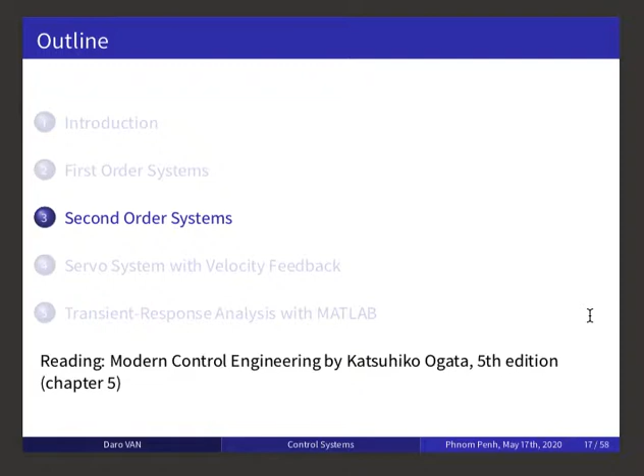In this section, we'll discuss second order systems. We shall obtain the response of a typical second order system to a step function, unit step input, ramp input, and impulse input.

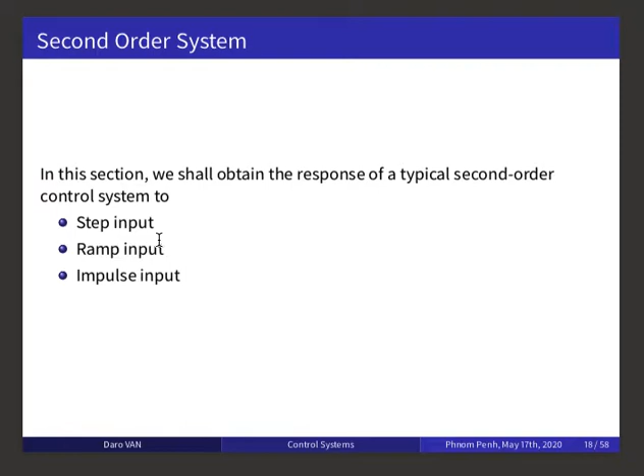Let's consider the servo system. It consists of a proportional controller, K, and there is no S here, and load elements: inertia and viscous friction, the damper.

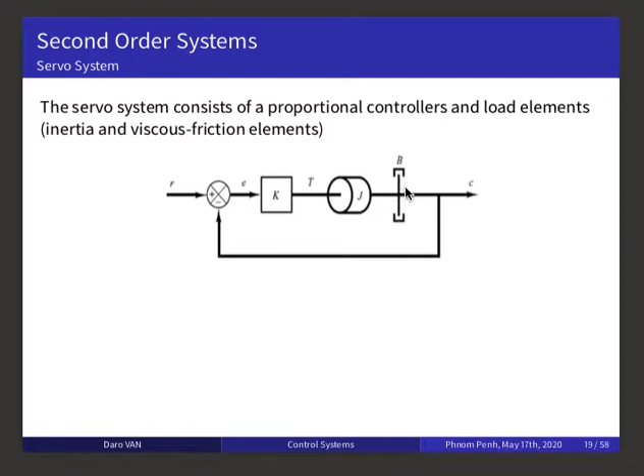Suppose we wish to control the output C, the output position, in accordance with the input position R. So the equation for the load element is this.

J is the inertia, C double dot is the second derivative of position. B is the damper, C dot is the first derivative of position. And T is the torque produced by the proportional controller, K.

This is in the time domain, so we want to transform it to the S domain. You need to take the Laplace transform of both sides and assume zero initial condition. You will obtain these equations.

After a little bit of manipulation, you will obtain this transfer function, Cs over Ts. So using these transfer functions, can you find Cs over Rs?

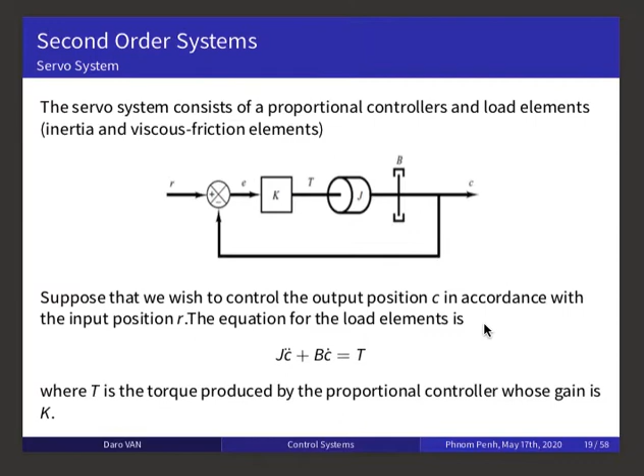Can you? Or you can use this block diagram.

Please try, maybe for 10 minutes. Then after 10 minutes, you can come back to the class.

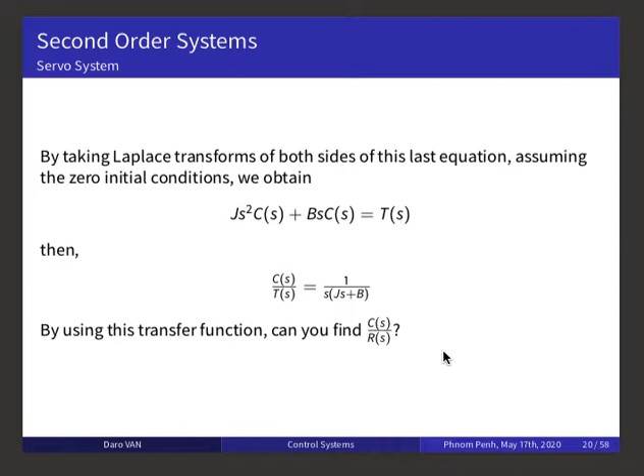Let's continue. This is block diagram A, and from this block diagram you can obtain this, which is what we did in the previous slide — the ratio between Cs over Ts. Then you need to combine these two blocks.

If you don't remember how to do this, go back to lecture 5 on block diagrams. Combine this block, you will obtain this one. Then you need to combine this block with this block.

Then you can find the ratio between Cs over Rs given by this. So the first equation can be rewritten as this one.

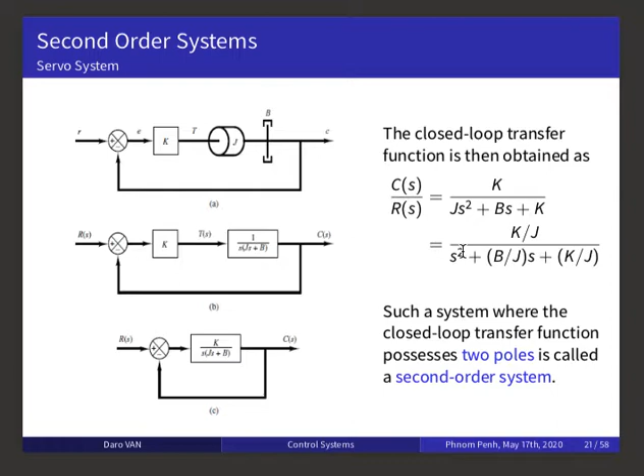A system like this has two poles. The pole is the root of S in the denominator. This is called a second order system, with S squared.

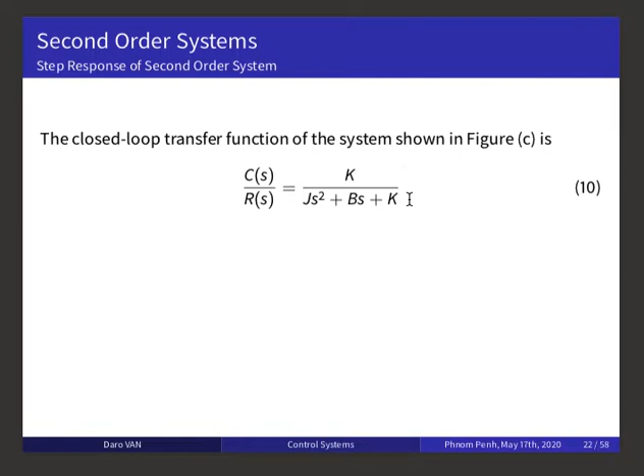Now the closed loop transfer function of the system can be found like this, and can also be written as this.

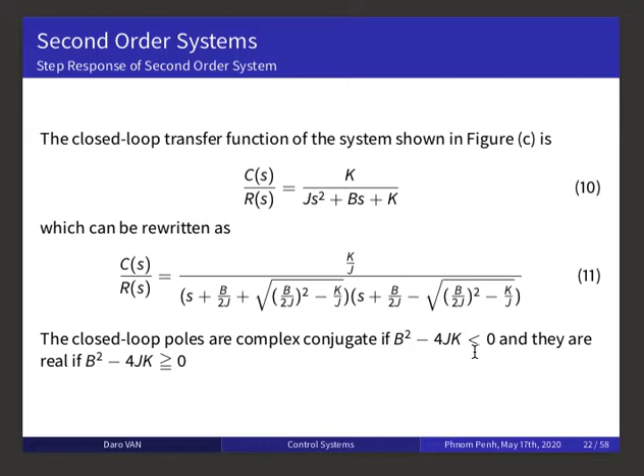So the closed loop poles are complex conjugate if B squared minus 4JK is less than 0, and they are real if this is larger than or equal to 0. So in transient response analysis, it is convenient to write K over J equal to omega n squared.

B over J equal to 2 psi omega n equal to 2 sigma, where sigma is called the attenuation and omega n is called the undamped natural frequency.

Psi is called the damping ratio of the system, and the damping ratio psi is the ratio of the actual damping B to the critical damping Bc, given by these equations.

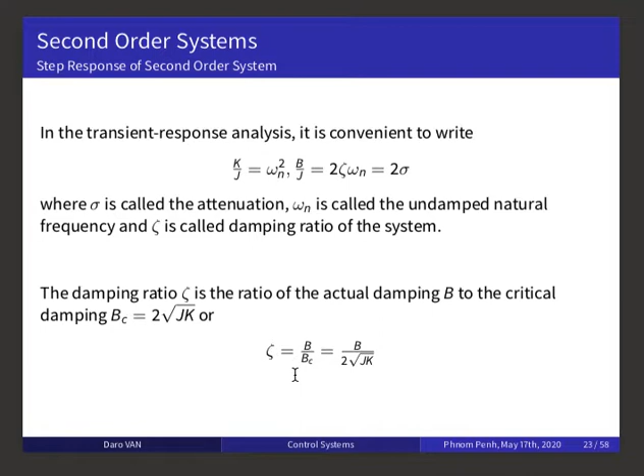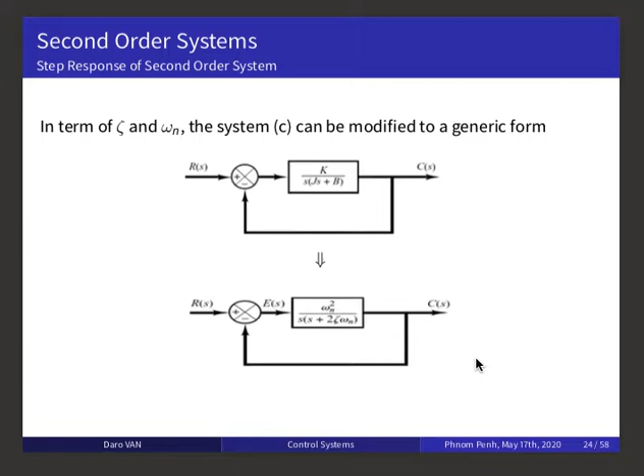So in terms of psi and omega n, the system C can be modified to a generic form, which is given by this, in terms of omega n and psi.

So when the closed loop system given by equation 10 can be rewritten as this. This is called the standard form of a second order system.

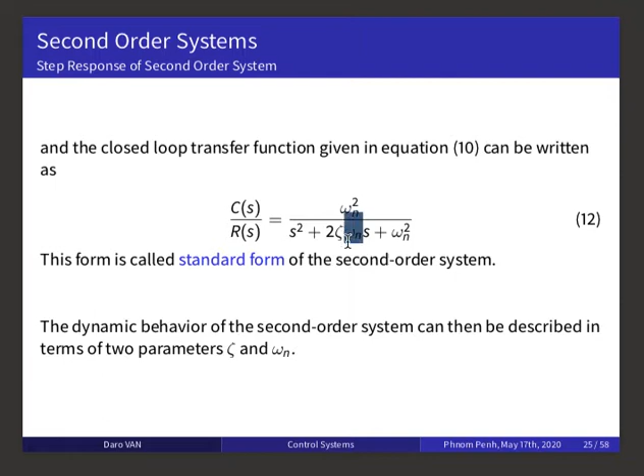So the behavior of this system only depends on this omega n and psi.

Next, let's move to the case where 0 less than psi less than 1. The closed loop poles are complex conjugates, and they lie in the left half plane. So the system is called underdamped, and the transient response is oscillatory.

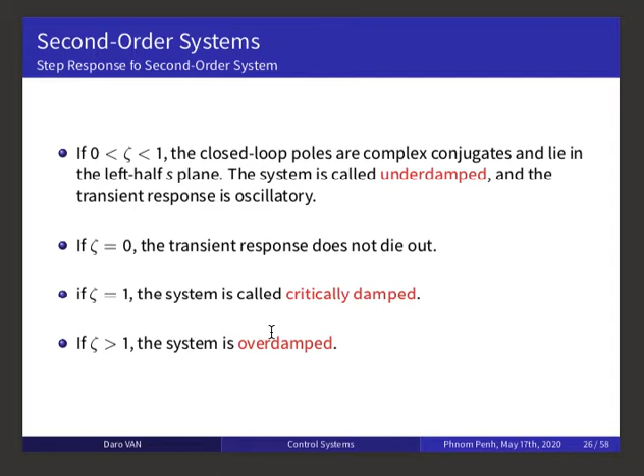If psi equals 0, the transient response does not die out. If psi equals 1, the system is called critically damped. If psi is larger than 1, the system is overdamped. So we shall now solve the response of the system shown below, like this.

Now consider the underdamped case with 0 less than psi less than 1. In this case, Cs over Rs can be written like this, where omega d is given like this, and this is called the damped natural frequency. This omega d is called the damped natural frequency.

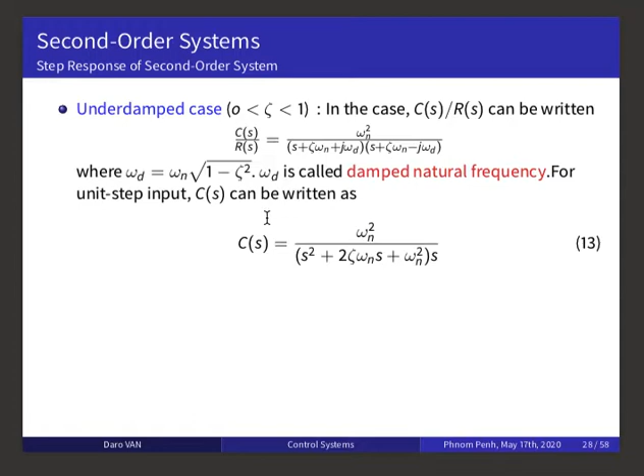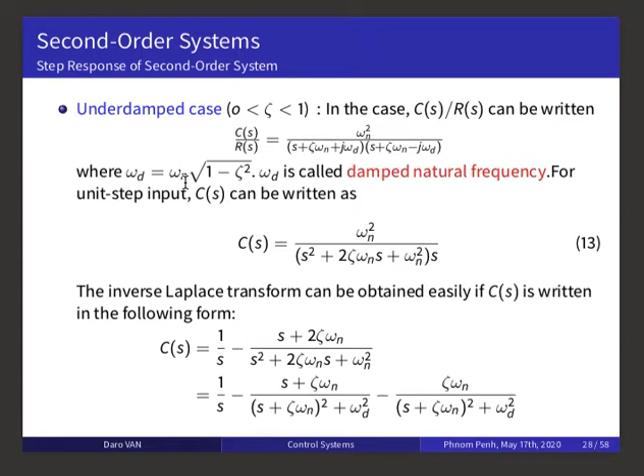So for the unit step input, Cs can be written like this. Do a little bit of math, then take the inverse Laplace transform. Before taking the inverse Laplace transform, we need to rewrite this Cs in this form, and then we can take the inverse Laplace.

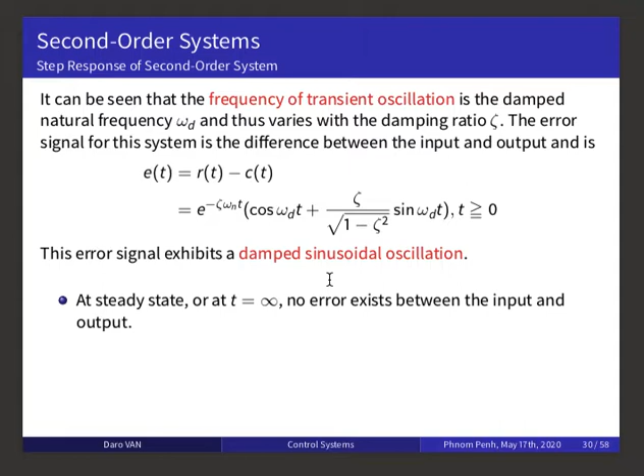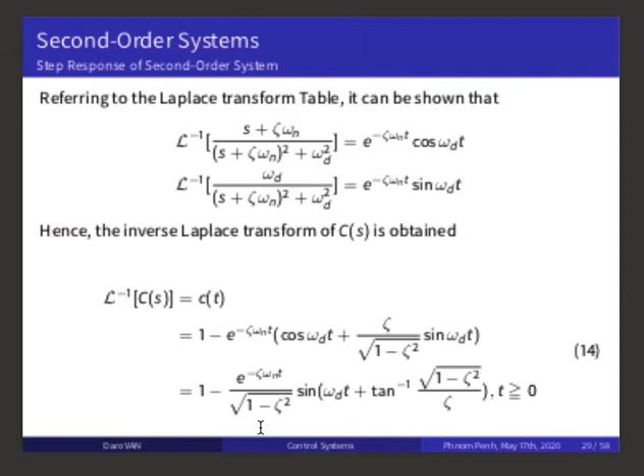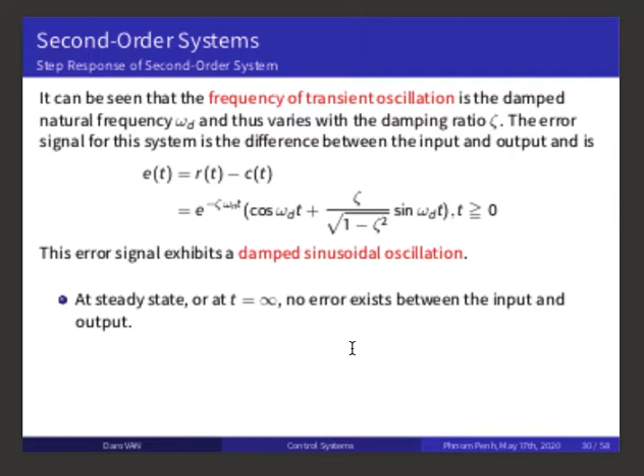And if zeta equals 0, then Ct will only equal this one, meaning when zeta equals 0, this term will be gone, and only this remains: 1 minus cos omega n t.

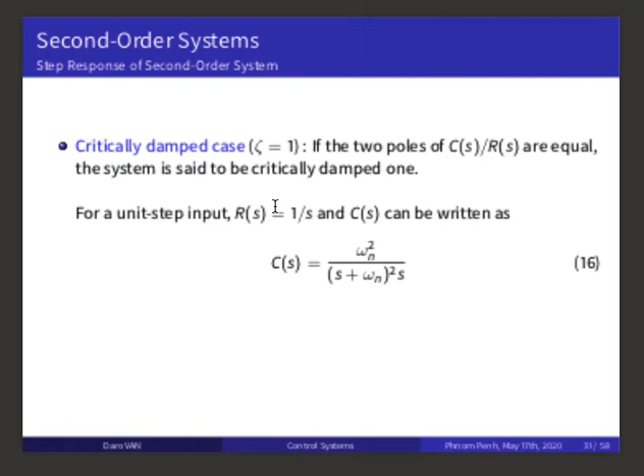In the case of critically damped, zeta equals 1, if the two poles of Cs over Rs are equal, the system is said to be critically damped. So for the unit step input Rs equals 1 over S, Cs can be written like this.

You take the inverse Laplace transform, and you can find Ct in the time domain.

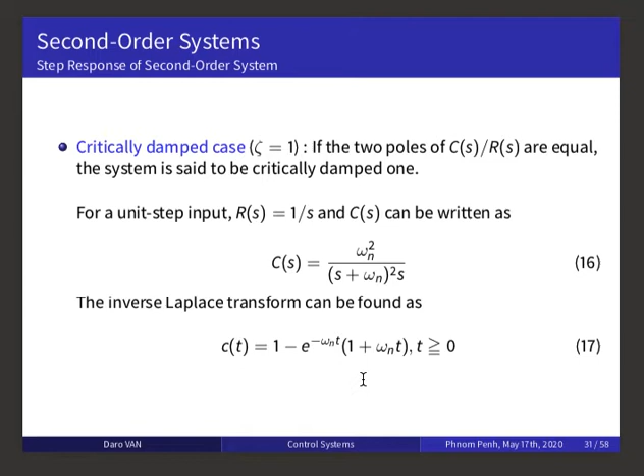In the case of overdamped, where zeta is larger than 1, the two poles of Cs over Rs have negative real parts and are unequal. For the unit step input 1 over S, Cs can be found like this.

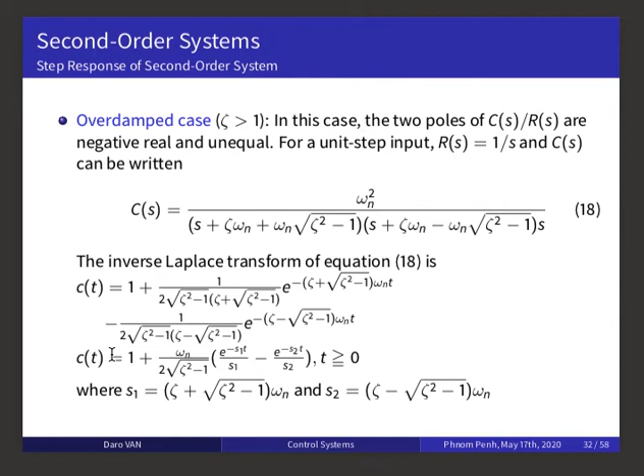And we'll do the same process. You can find Ct in the time domain.

So when zeta is appreciably greater than unity, one of the two decaying exponential terms decreases much faster than the other. So the faster decaying exponential term may be neglected. It means that this is much greater than S1.

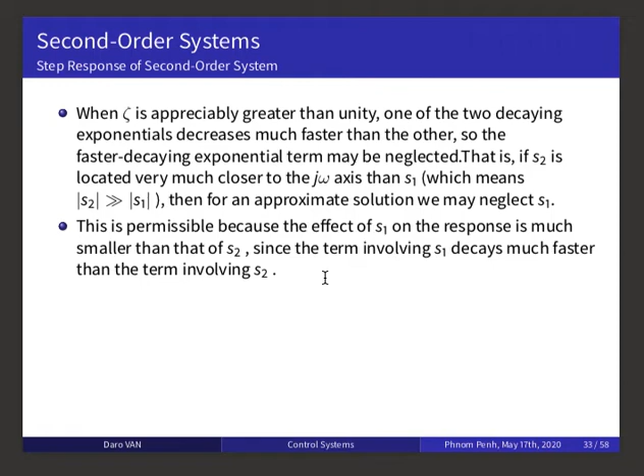Then for an approximate solution, we may neglect S1. This is permissible because the effect of S1 on the response is much smaller than S2, since the term involving S1 decays much faster than the term involving S2.

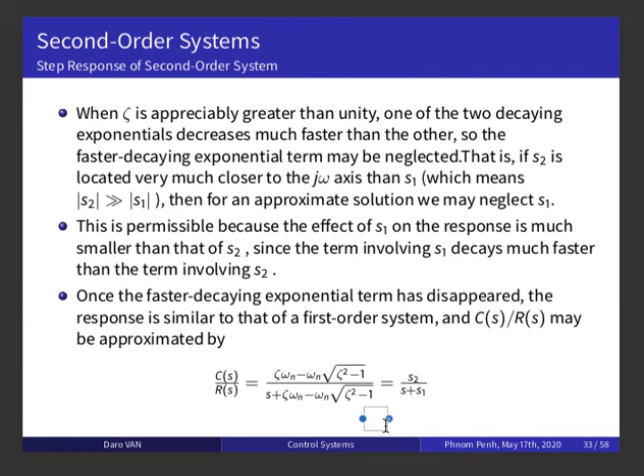So when the faster decaying exponential term has disappeared, the response is similar to that of the first order system, which is this. So with an appropriate transfer function Cs over Rs, the unit step response can be obtained like this.

And the time response Ct can then be found. So this gives an approximate unit step response when one of the poles of Cs over Rs can be neglected.